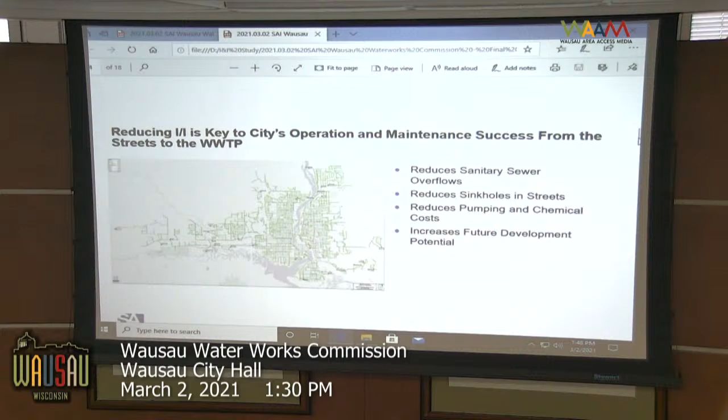It reduces SSOs, the incidence of SSOs, and for that matter, water in the basements. Water in the basement isn't always caused by wet weather, but at times it is. It reduces sinkholes in the streets that might be associated with defects in the collection system. It certainly reduces pumping and chemical costs when you can reduce your I&I. And if you reduce the I&I, you have more capacity in your system, increasing the capacity you might have for future development within the city.

I think we missed one there. No? Okay, I was going to touch briefly on I&I sources. Maybe that's, okay, alright, sorry, this is just a wee bit out of order.

I just wanted to give you a big picture overview on I&I, where it enters a collection system. It has the potential to enter in several locations. A big one is vented covers or open pick holes. If water ponds in the streets, it can easily get into the collection system. Down in the manholes, you've got joints, steps, service connections - those are all potential I&I sources. And then down in the system, the pipes themselves have joints, service connections, and cracked pipe. So that's just a real broad look at where this extraneous water might get into our system.

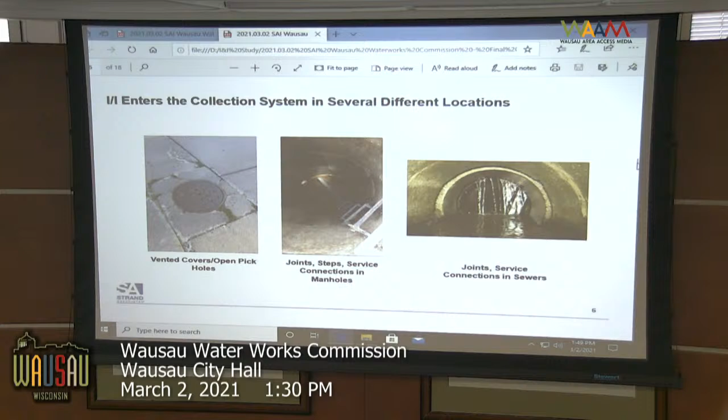And with that, Ryan is going to walk you through the specifics of the project. If you could go back to the previous slide. Thank you.

Thanks, Andy. So the flow metering that we conducted this past summer collects sound quality data to evaluate your dry and wet weather flow patterns. The two pieces of equipment shown on this slide are the flow meter itself, which has a transducer that records the level and velocity in the sewer, and a tipping bucket style rain gauge to collect time-sensitive rainfall data throughout the study.

The chart and graphic in the center of the slide shows a typical flow graph, which we're trying to recreate in the city sewer. There are four components to that graph. The yellow portion is the sanitary sewer itself - in a utopian world, that would be the only flow conveyed to the treatment plant. The red area above it is the I&I, the inflow and infiltration. The sharp peak, the steepest point of the red I&I graph, represents the inflow, and the tailed off end is the infiltration.

Inevitably, you're probably going to have some groundwater infiltration, which is the bottom portion of the graph - groundwater that's going to get into your pipes unless they're perfectly sealed. And lastly, coming from the top portion of the graph is the rainfall, showing the response to that wet weather event. The last picture shows how that flow metering equipment is installed in one of the sanitary sewer manholes.

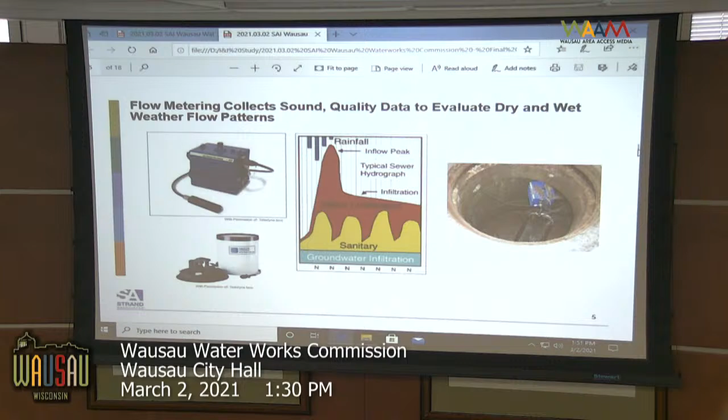The city collection system was divided into 15 drainage basins for a comprehensive analysis. The graphic shows a map of the city, and each different color represents a different drainage basin, where everything shaded in one color flows to one particular point.

The smaller red stars at the downstream end of each basin are where a flow meter was installed, and the blue raindrops are where a rain gauge was used. Two of these rain gauges were installed by Strand, and the rest were monitored by Weather Underground. These 15 spots were chosen in conjunction with city staff, who visited sites to make sure they were conducive to measuring accurate flow data.

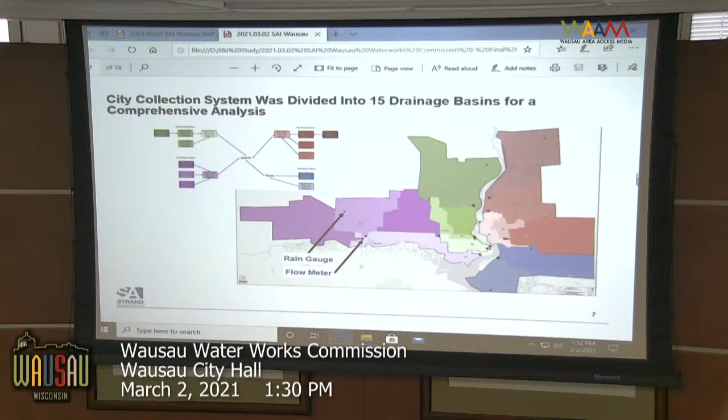These were monitored for 12 weeks. The block schematic in the top portion of the figure shows how each of the meters relates to each other. For example, the three darker purple shaded areas all independently flow into the furthest downstream light purple area, which measures everything that's purple.

After the 12-week monitoring period, summary sheets were completed to provide valuable information on the wet weather flow. For each of the 15 flow meters, a 2-page summary sheet was created. This is an example of one of them.

The first page of the summary sheet contains a blown up, zoomed in figure of what portion of the collection system the flow meter was measuring. That color coincides with the color on the larger figure displayed earlier, along with some basic information about the site, what manhole it was, the pipe diameter, and the tributary area.

The table on the other side of the slide contains a bunch of nerdy engineering wet weather parameters, which are all included in the appendix of the report, which can be viewed if someone is interested. But the report itself contains a gleaned out version of those results.

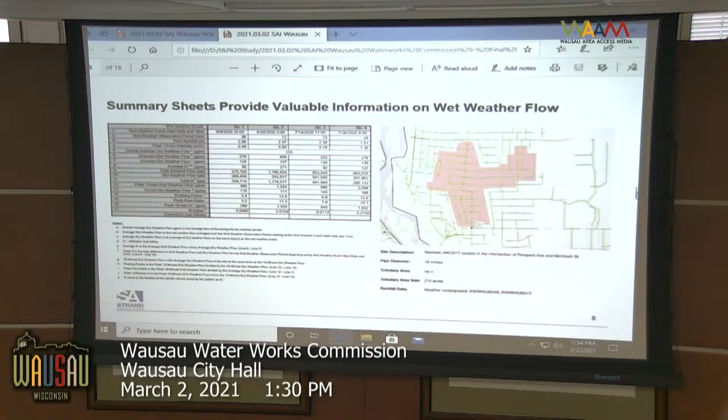The second page of each summary sheet contains a graphical representation of the 4 wet weather events, trying to recreate that general flow curve mentioned earlier. The flow meters aren't able to measure the groundwater infiltration I mentioned earlier, but the orange line, the bottom line of the 4 graphs from each flow meter, is from a dry weather period in the city, where we took about 2 separate weeks with no rain or minimal rain, to hopefully have a strong base flow to compare to.

During the 4 periods of wet weather, the blue line indicates the response. The gray line on these graphs, coming from the top, is the time-sensitive rainfall information. We chose this sheet as an example because this particular basin shows a very strong response - when it rains, your flows spike pretty significantly.

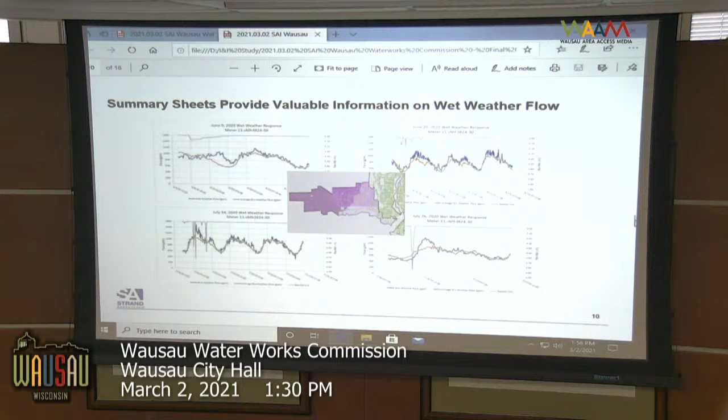Here's an example of an area of the city that didn't have as much of a response - this is the entire southwest basin, shown in everything that's purple in the center graphic. You can see the blue lines in the 4 graphs are fairly matched up with the orange lines, despite some significant wet weather events. This shows it's a newer part of the city, probably with tighter sanitary sewer infrastructure, and is going to be less susceptible to inflow and infiltration.

So we gleaned out the important information from all that data, and the flow metering results focus maintenance activities for 1.2 million feet of sewer infrastructure included in the city. The table shows each of the 15 meters with 3 important parameters. The first is the peak 15-minute wet weather flow, the absolute peak flow observed during the monitoring period, along with a dry weather flow taken at the same time as that peak.

So if the peak 15-minute wet weather flow occurred at 2 o'clock on a Tuesday, ideally the number shown for 15-minute dry weather flow is from 2 o'clock on a Tuesday during the dry weather period. The ratio between that wet weather flow and the dry weather flow is called a peaking factor, and that gives you an idea of how severe that inflow is.

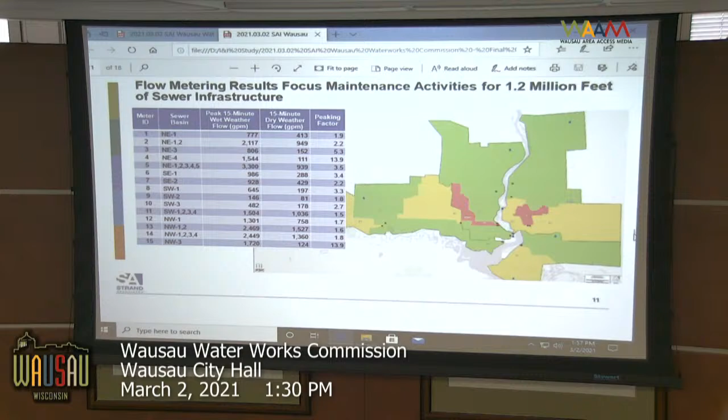Now the map of the city collection system shows each of the 15 basins and meters we've been talking about, but now they've changed colors to indicate how severe that peaking factor was. The 2 basins highlighted red have peaking factors of close to 14. Wisconsin DNR requires that if you're going to build a new subdivision or development area, you plan for a peaking factor of between 2.5 and 4. So a peaking factor of close to 14 is much more severe than that.

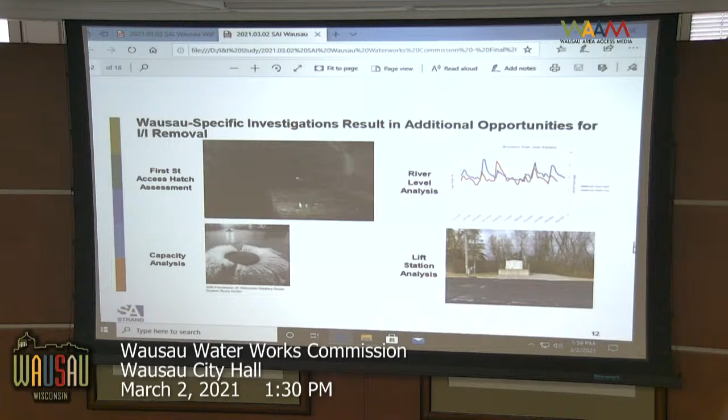And then we also did a bit of analysis on the city's 26 lift stations and tried to do some of the similar wet weather parameters that we had calculated for the meters, but just in a more focused, usually smaller area that is tributary to the lift stations.

And finally, the recommendation summary provides the city an outline for future evaluations and capital improvements. The three steps to reducing I&I in the system.

The first one is to identify the problem areas, and that was completed with this flow metering and I&I investigation. The second is to pinpoint specific I&I sources, and then lastly would be rehabilitation or replacement of some of that infrastructure to reduce the I&I.

The table on the slide documents each of the 15 sewer basins, with a priority of low, medium, and high, which coincides to the green, yellow, and red colors on the previous figure, along with recommendations and an engineer's estimate for a cost for those to pinpoint the specific I&I sources.

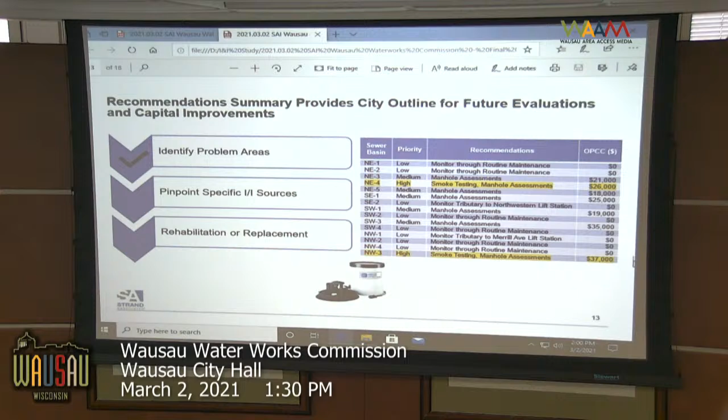In addition to that, we did also include a recommendation of installing a tipping bucket style rain gauge, similar to the temporary ones that we had in our study, but to install one of those permanently at the treatment plant to connect with the treatment plant SCADA system for more time-sensitive rainfall data.

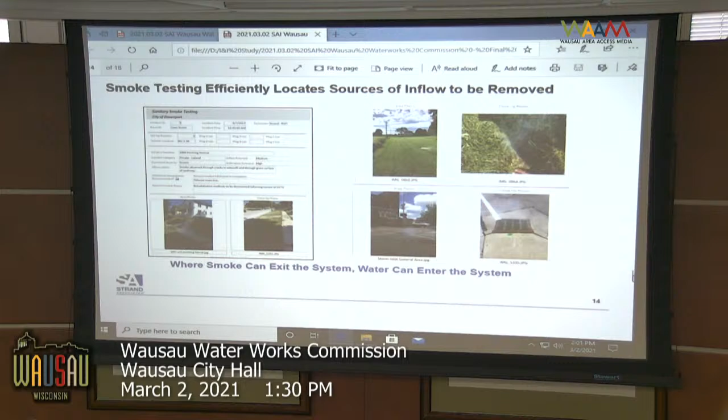And the report form that's filled out in the field is also shown on this slide, which documents the defects, specific source, and gives the city direction on how to fix them and minimize the I&I into the system.

Next. And the second component that we mentioned in our report is the manhole assessments, which provide another layer to the city's existing asset management practices. The city does a good job now of assessing and maintaining issues and defects in the sewer with its annual televising and cured-in-place pipe lining programs.

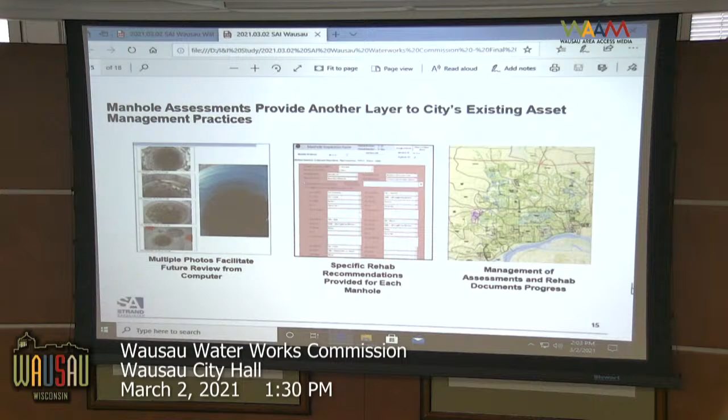In summary, the 2020 infiltration inflow analysis summarized the baseline for the city's existing dry and wet weather sanitary sewer flows. The flow metering collected sound quality data to evaluate dry and wet weather flow patterns. The flow metering results focused maintenance activities for the 1.2 million feet of sewer in the city. The Wausau specific investigations resulted in additional opportunities for I&I removal. The future activities we recommended were smoke testing, manhole assessments, and collection system rehabilitation.